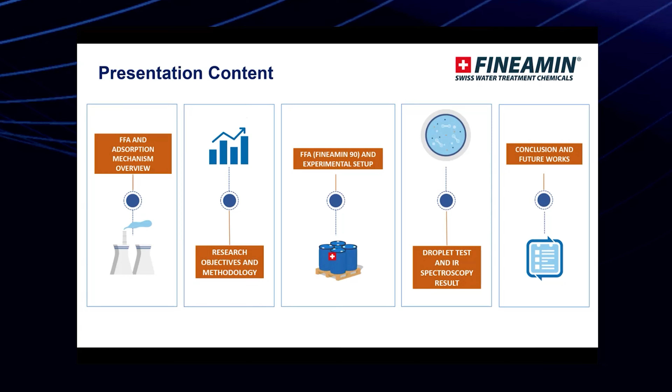of filming amines. Then I will go into research objective and methodology. I will go into some information about our product, Fineamin 90, and also the experimental setup. And then I will go to the droplet tests to measure or to confirm the hydrophobicity of the product and also the IR spectroscopy results. And then I will make the conclusion and future works. So these are my presentation contents.

So now we're talking about the FFA and its adsorption mechanism overview. So this is the general formula of the FFA. As you can see here, we are using a surfactant, which is a surface active compound that has two amino groups. That means the two amino groups which have the nitrogen content have a very strong affinity to the metal surface, and there is a lone pair of electrons of the nitrogen that will adsorb on the metal surface.

And on this metal surface, ideally, it will be adsorbed, and it will be stable under boiler conditions, and this will provide the mechanical protective barrier between the metal and water. And because of the nature of the FFA as a surfactant, we have the hydrophilic part, which is the water liking part of the molecule, and also the hydrophobic part of the molecule, which does not like the water, so it will try to repel the water. So it is called an amphiphilic molecule, and it will have a strong affinity to the metal surface, where it will protect the metal against corrosion.

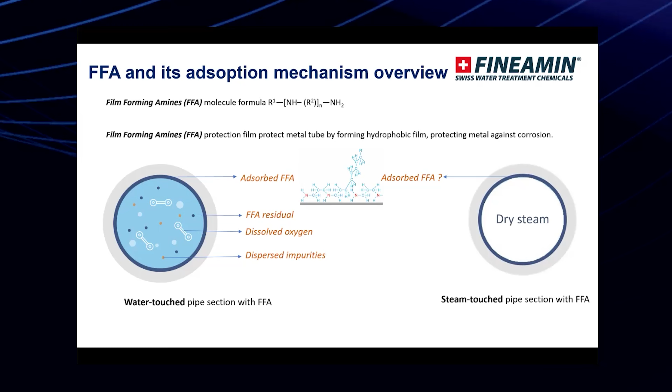So these are some of the questions that we want to answer. I think it is also important for us to really understand whether there is adsorption and eventually protection on the dry steam part.

So as I mentioned, this is a research study, one of our research studies actually, of the filming amine adsorption on the superheater circuits. The objective is investigation of OLDA, and just for information, OLDA is part of FFA. FFA is a generic name, filming amine, and many different companies may have different amines. Let's say it's a filmer, so they can be oleylamine or octadecylamine, ODA, and we are mainly working with OLDA, which is oleyl propylenediamine.

So we want to investigate specifically OLDA because this is the filming amine that we use the most. We want to investigate the OLDA adsorption onto the metal surface under dry steam conditions. So the methodology is we have metal specimens that will be exposed to dry steam that have been treated with either AVT(O), in this case AVT(O) treatment of ammonia, and Fineamin 90.

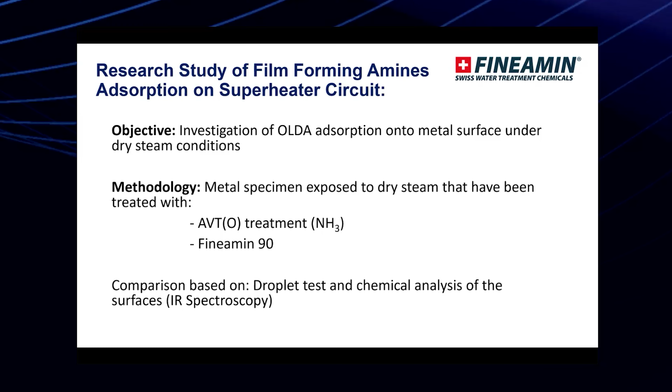So the product overview: Fineamin 90 contains FFA and alkalizing amines. The alkalizing amines are based on monoethanolamine, or 2-aminoethanol, MEA, and you also have cyclohexylamine. And the FFA that we use is based on oleyl propylenediamine, OLDA, or sometimes we call it polyamine as a short form. So in this case, as you can see, the molecular structure of the OLDA is a long alkyl carbon chain.

So if you see here, you have one amino group here and another one here. You can see this is the N. The blue is the N, nitrogen, red is oxygen, and the H is the hydrogen. So there's one amino group here, one nitrogen and a second nitrogen here. This is what we call the polyamine. So you have a certain structure that will attach to the metal surface, and the long alkyl carbon chain gives the hydrophobicity effect.

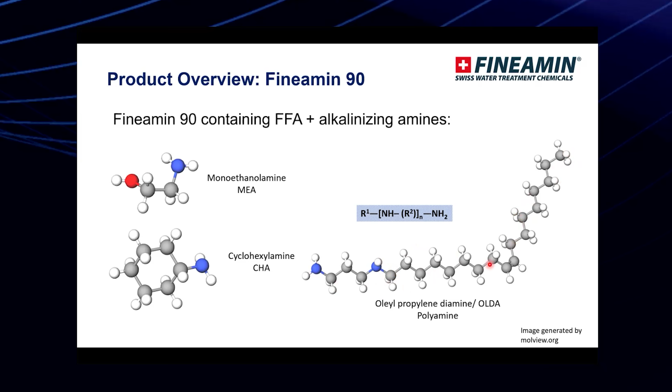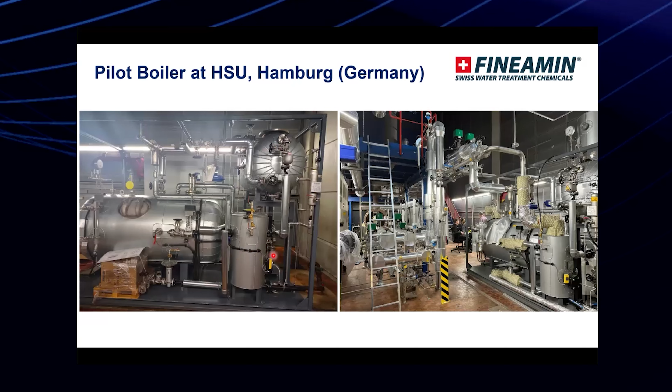So now into the pilot boilers, and this is the experimental part that we are trying to do. These are the boiler and the deaerator feedwater tank, and it will produce the steam and also superheated steam. This is in Hamburg, Germany, at the Helmut Schmidt University. So this is the schematic pilot boiler at the HSU.

Starting from the tap water, we do pre-filtration, then reverse osmosis and mixed bed. After that it goes to the feedwater tank, deaerator, and then the steam generator. Then it passes through a steam dryer, goes to the mass flow control, then to the steam distribution, and then it will be reheated to superheated.

These are electrically heated boilers, and eventually the superheated steam will go out, and there is a probe, a metal specimen where the superheated steam will adsorb on the piece of metal. So just for information, these are boilers that are used in the university.

There are no online measurements on the water data, no sampling point in the steam, and for safety reasons the boiler can only be operated a maximum of 8 hours a day. This is for the safety of the university. So these are the limitations that we have at the moment, which we have to take into account since this is a boiler in the university.

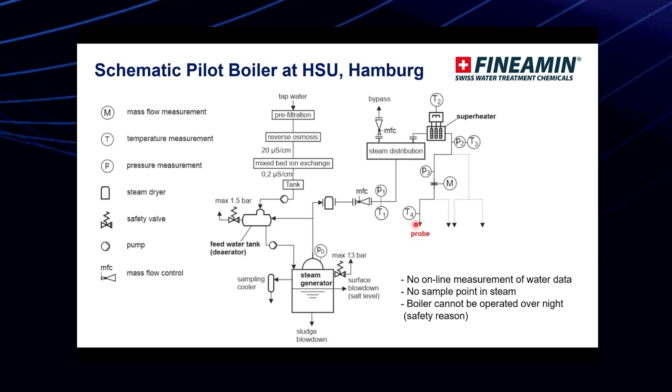So the characteristics of the boiler: 500 kilowatt maximum power, electrical heating continuously measured, maximum pressure 13 bar, and maximum steam production 500 kilograms per hour. It is a once-through boiler, the material is stainless steel, and the superheater is electrically heated to a maximum of 400 degrees Celsius.

In terms of the trial parameters, we will use deionized or demineralized water, with the pH adjusted to approximately 10.1. Boiler pressure is 11.5, steam production 163 kilograms per hour, and there is no steam to the degasser, so that there will be no complication with the mass balance, because otherwise it will be very difficult to do the measurements.

All steam will go to the superheater, which is electrically heated, and it exits at a temperature of 260 degrees Celsius and pressure of 4.5 bar, and the test specimen sits directly after the steam exit.

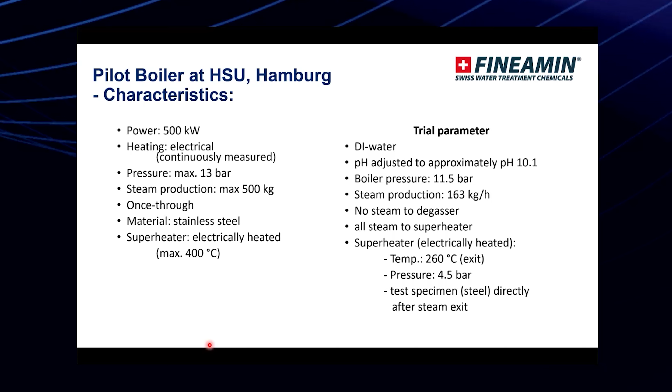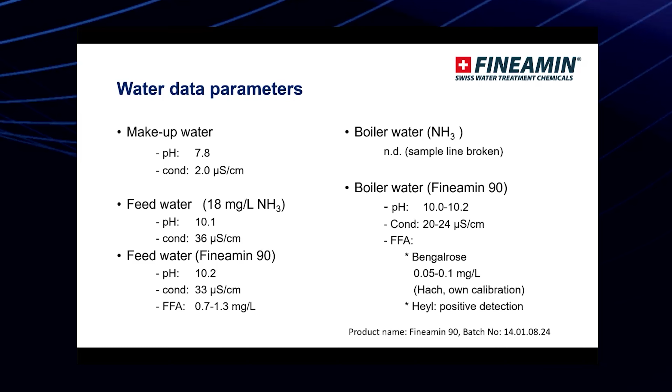And we also used the Hach test kit just for semi-qualitative detection, and it is a positive detection. We did our own calibration curve based on absorption versus the OLDA as active. So we use our own calibrations, and the optical path is 2.54, 1 inch. We use the Hach film forming amines reagents, and also have sample cells, and we are using the DR 1900 as a photometer.

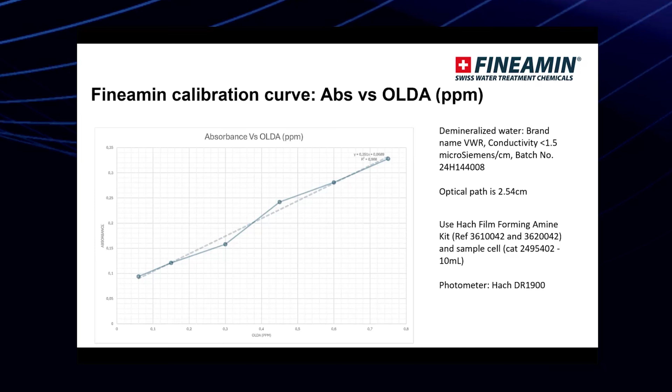So because Hach didn't provide a calibration curve for a smaller photometer, we have to do it ourselves, and that's one of the reasons why we have our own calibrations. But if you have the higher Hach, like the 3900 or even higher, then you can find the program directly there, so you can take the measurement easier.

The test concept: we place this metal plate, around 5 centimeters by 5 centimeters. This is the test specimen steel, and the front side is exposed to the steam. So we're doing the baseline, meaning it will be subjected to dry steam treated with ammonia. Then we run it for 1 day, and after that we replace the test specimen and start with the Fineamin treatment. Then we put a different test specimen and see the absorption on the metal surface.

So this placement and removal test is directly after the superheated steam, as you can see here. Later I will show you the video of exactly where we put the test specimen. But it's really just after the exit of the superheater, and then of course it will be going outside of the building.

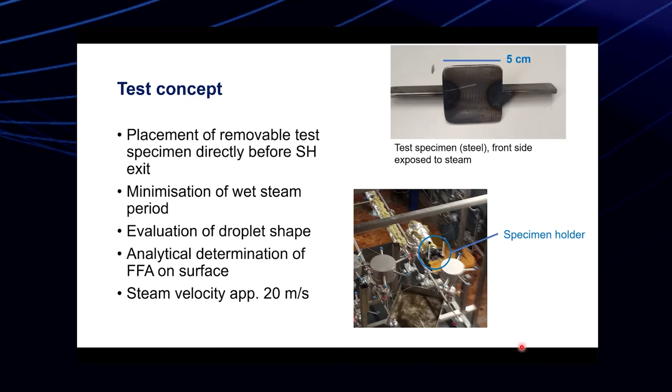So we try as much as possible to minimize the wet steam period, because we want to make sure that as much as possible it is dry steam; this is what we want to confirm. And then after that, we do evaluations on the droplet shapes and analytical determination of FFA on the surface. So this is what we are doing.

So here is how we measure and place our specimen. Just a little bit of warning, it can be a little bit loud. As you can see, the guy is wearing ear protection, so it can be loud on your computer. But you can see the superheated steam is already being produced. So before we open the valve, they put the test specimen, the steel plate, like this, and they put it here. If you can see it, this is where they put it. And after that, this is the exhaust.

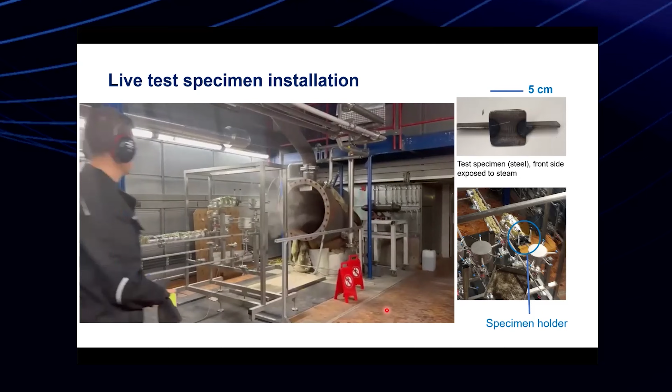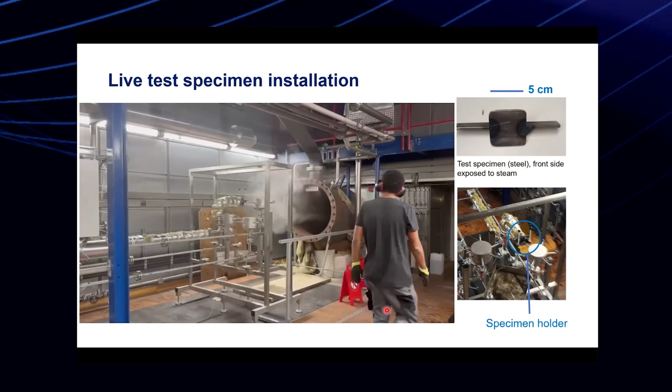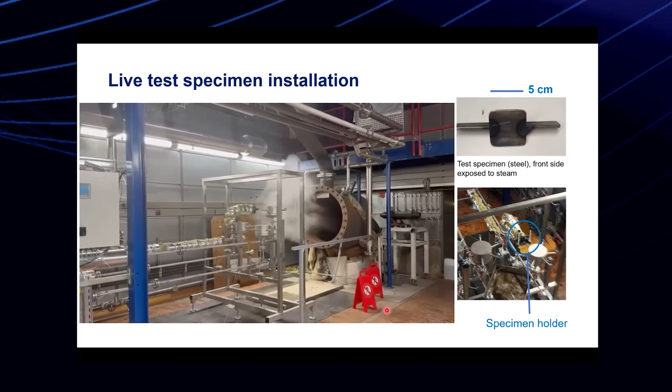So as you can see, once they put the specimen inside, the steam is live steam, and this is where the steam starts immediately. This is your superheated steam. So we want to make sure that there is absorption on this metal surface. Of course, there will be some limitation because the boiler is only operating a maximum of 8 hours, but at least we want to see whether we could see any absorption on the metal plates.

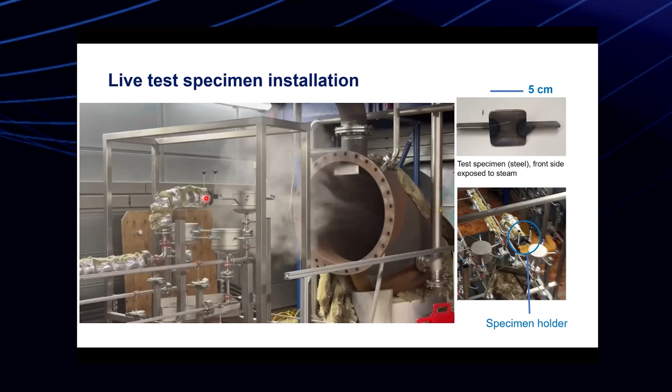So this is where the test specimen is, just right after the exit of the superheater, and the temperature is around 260 degrees Celsius. As I mentioned, it's important to minimize liquid formation, and the superheated steam flow can be cut for specimen installation and removal. It can be done quite easily; it's quite modular in a sense. It's almost instantaneous stop of steam flow and installation of the specimen where the steam is already at the desired temperature. So we did a calculation of the liquid time, and we are still trying to finalize this.

But generally speaking, we try to calculate an estimation of the liquid time based on the heating capacity of the steel, which is 0.5 kilojoules, and then the weight of the specimens and the heating, and we measure around 7.5 kilojoules. And of course, the maximum period of a wet phase can be achieved when all heating energy for the specimen is taken from the condensation of steam.

So in this case, the condensation enthalpy is around 2,200 kilojoules per kilogram. So around 4 or 5 grams of steam needs to be condensed. And then with the steam flow around 163 kilograms per hour, we calculate the liquid time is very, very small. I would say it's pretty insignificant. It's less than 0.1 seconds.

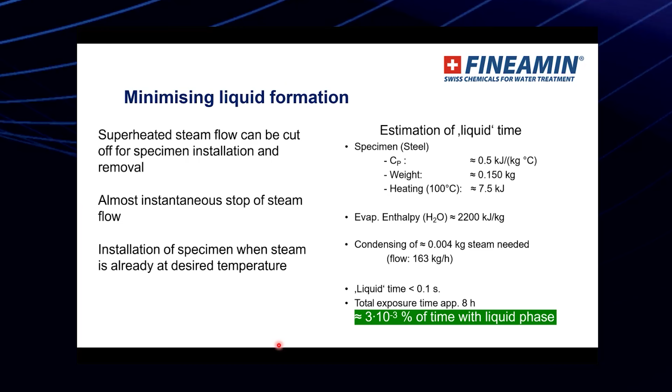And if you take the total exposure time, approximately 8 hours during the experiment, it's 0.003% of the time with liquid phase. So it's really insignificant. Of course, this is with the estimation that the heat capacity of the dry steam before condensing is not considered. So based on this assumption, we can say the time for the liquid phase is insignificant. So we can say this is a completely dry steam. So when the FFA adsorbs, it is on the dry steam.

The droplet test, we see a clear indication of FFA adsorption. As you can see, the difference on the metal plate. This is after we take the test specimen, cool it down, and then do a droplet test, and we could see a clear difference in terms of the hydrophobicity of the metal plates compared with those with ammonia. With the Fineamin 90, we can see there's much better hydrophobicity. And bear in mind, this is only 8 hours of adsorption of the dry steam.

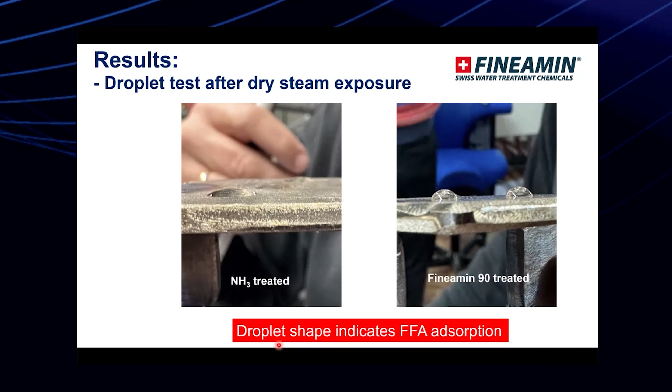We also do the chemical analysis on the surface after dry steam exposure, using liquid chromatography with mass detection. What we do is we try to dissolve the FFA from the surface: we swab one half of the specimen with methanol, then we do extraction in methanol, and we determine the OLDA by liquid chromatography with mass detection.

Unfortunately, nothing was detected, and I think we can say the sensitivity of the method is not sufficient based on the liquid chromatography. Dr. Wolfgang made some comparison with the literature data of monolayers from different publications. So what we see is that the detection limit is not high enough. So we have to go to the next one, which is more sensitive.

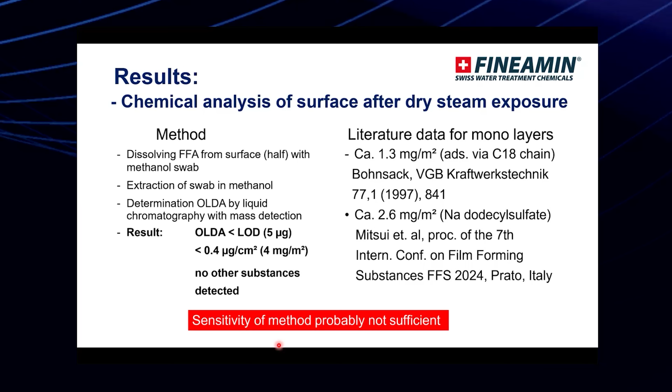In this case, we're using infrared spectroscopy, and here we see results of the carbon-hydrogen bond stretching. There is a clear absorption. Just for your information, we swabbed half of the steel plates with methanol, so points 2, 4, and 6 were already swabbed, so there will supposedly be nothing there. So we focused on the other parts, 1, 3, and 5, and we could see a clear indication of the carbon-hydrogen vibrational bonding, the C-H stretching between 2,800 and 3,000 per centimeter.

So you can see we have a clear indication of the absorption, and if you compare it with the one with ammonia, there is nothing. Of course this is a very focused IR, and we could not see absorption at other wavelengths, because we have to focus on a specific wavelength. We also want to see whether there's nitrogen bonding, but we will have to wait for the next result. We are going to test with XPS, where we want to see the elements or any bonding to other elements. So we have to wait a little for the XPS result.

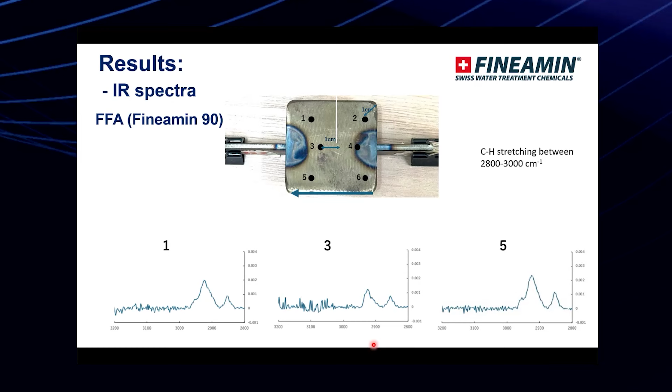We will continue with the XPS, but this is something that's really positive in our opinion, and we could give some insights to the existing questions, whether or not FFA is adsorbed on the metal surface in dry steam conditions. So in conclusion, and probably some future works: the droplet test, we could see a clear indication of FFA adsorption.

We can see the hydrophobicity, and there is a clear difference; the water droplet arrangement is completely different compared with ammonia. So there is hydrophobicity there. And also from the IR spectra, which have been kindly provided by the Department of Applied Chemistry at Tokushima University in Japan, there is a good indication of FFA adsorption on the dry steam.

And of course, when we compare with the test specimen treated with ammonia, we could see very different results. There is a clear distinction between the spectra of ammonia and FFA. So we can conclude that there is protection by FFA on the steam-touched circuit as well. And as I mentioned, XPS analysis is to follow, and it's also interesting for future works to test with our different products.